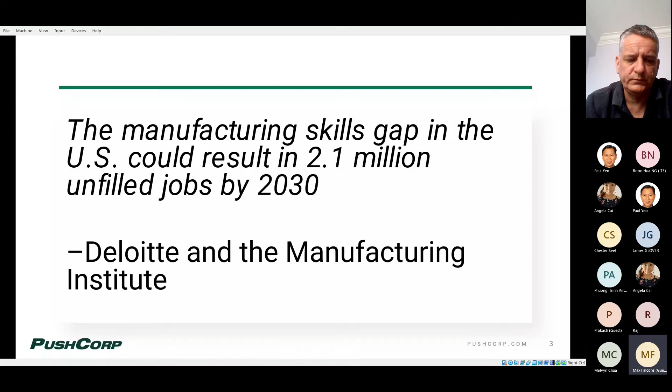So why automate polishing with robots? If you're an end user, like I said, there's labor shortages due to repetitive, dangerous, dull, dirty work, but also a need to increase consistency in the finish from operator to operator, process to process, person to person. Today in a manual operation, you can end up with a lot of variation, where an automated solution gives you a more consistent finish, wears the abrasive less, and is overall a more efficient process.

If you're an integrator, the reality is these polishing projects have less competition out there, and it's still a growing market as opposed to welding, pick and place, and packaging projects, which are very diluted markets right now.

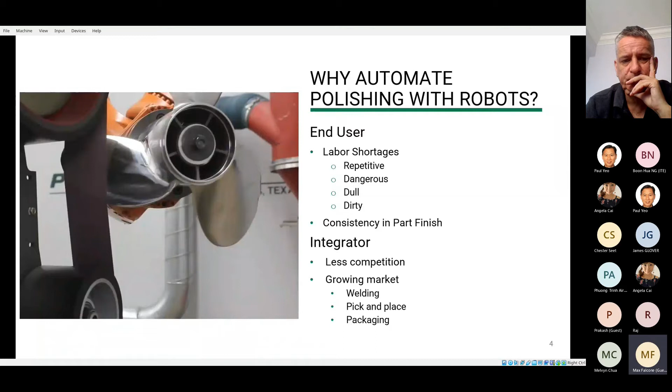So polishing versus buffing—what's the difference? Generally, polishing is done with abrasive belts and discs, and what you're really trying to do is achieve a desired surface finish, usually the reduction of pits, scales, and scratches. You're trying to get that entire surface to be consistent. Typically it's a multi-step process—you'll start with a coarser grit and end up in a fine grit, resulting in a certain directional scratch pattern within the part.

Then buffing complements polishing in that you're generally doing two types: your cut buff and your finish buff. Your cut buff turns the scratch pattern left from polishing into a finer scratch pattern, and your finish buff brings out that brilliant shine. So where polishing typically uses abrasives and discs, buffing usually uses pads—most often a cotton pad, but there are also foam type pads and other materials available for buffing.

In addition to the cotton buffs, many times there's a compound involved. There are new products out there like Norton Saint-Gobain's Fab that actually has the compound impregnated into it, so you just need a little bit of lubricant, like water, to achieve your final finish. The goal of buffing is typically to achieve a bright, lustrous finish, where polishing is just trying to get a consistent finish. Buffing almost always happens after some kind of polishing.

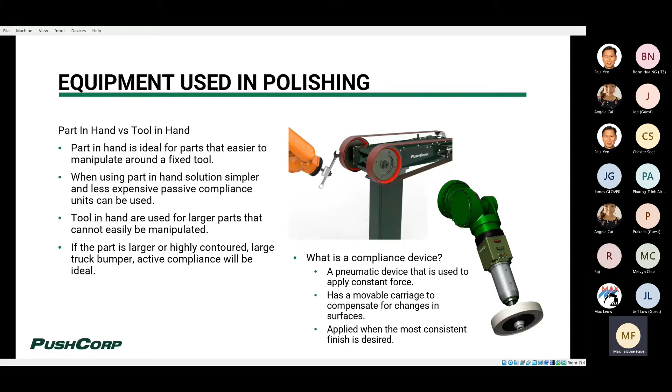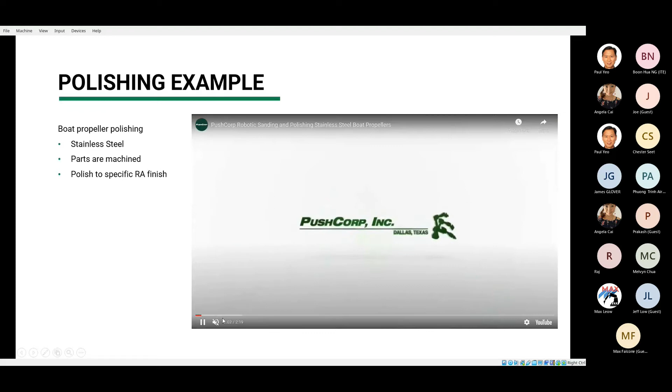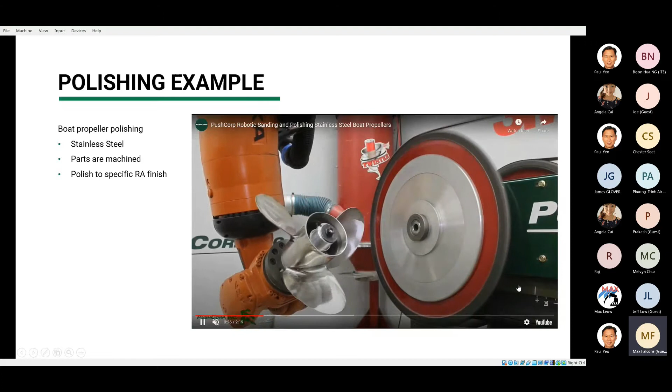So here's a couple example videos. This here is a polishing project for a stainless steel boat propeller that we were involved in. Here you're seeing the compliance device - if you guys can see my mouse, this is the compliance device. Like I said, it has a movable carriage. That unit is applying a constant force forward onto that part. As you can see, with the part in hand, we can handle these unique contours and shapes very easily. The compliance device is able to compensate for the position of the part.

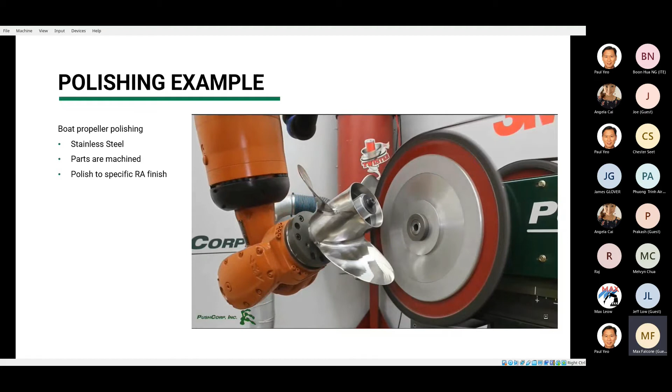One of the things that also helps speed up your process, especially with offline programming like we're going to hear a little bit about, is the robot program doesn't have to be exact, because the compliance device is compensating. So if your part varies some, you don't have to do any post-process vision inspection or offset, as long as the part variation is within the stroke of that compliance device.

Now here on the other side, you'll see we have a slack belt assembly where we allow the belt to wrap around the part, and we're able to achieve this very high gloss or very high surface repeatability finish on this part.

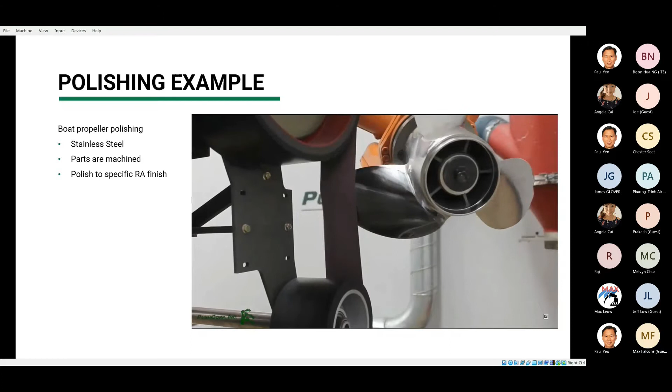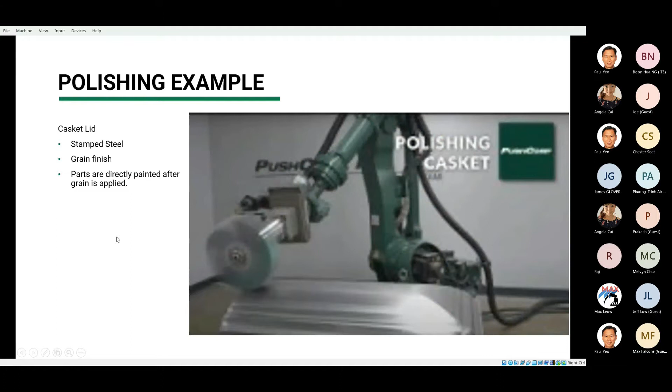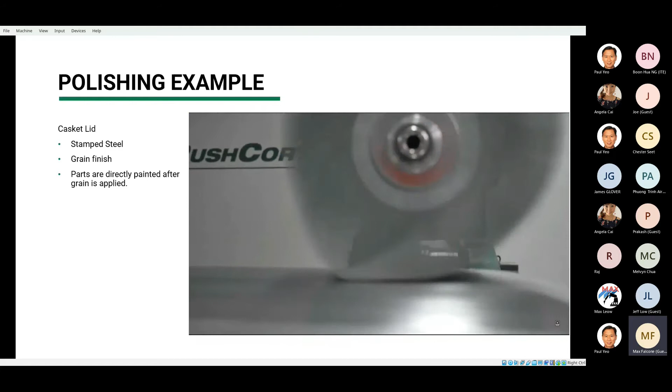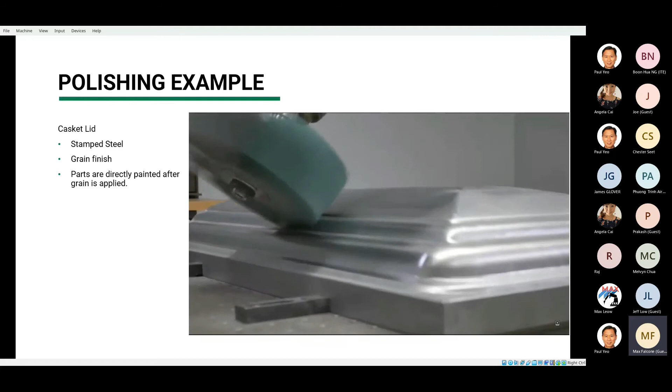So this is another polish project that we did. This is the lid to a casket. We are running a compliance device with a fixed spindle, and that's a 12-inch flap wheel there, where we are putting a grain finish on the top of this casket lid. When this process is complete, they will paint directly over the surface and the scratch pattern will come through the paint. So what we're trying to do is put a consistent scratch pattern in the lid of this casket here.

This is a stamped steel casket. So you can see that, again, the compliance device is compensating for the wheel wear as well as for the different contours on the part itself. So between the robot, the compliance device, the spindle, and the abrasive media, they're all working in concert to give you a consistent finish.

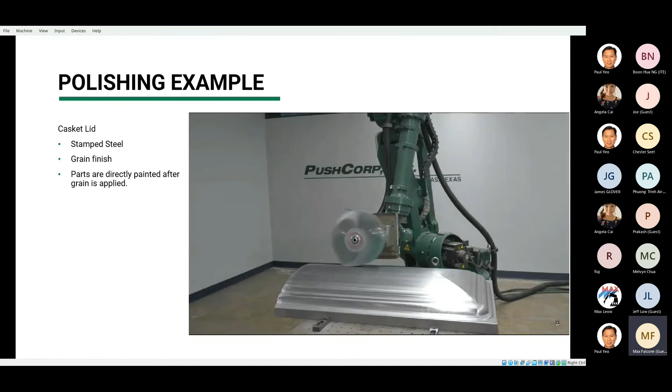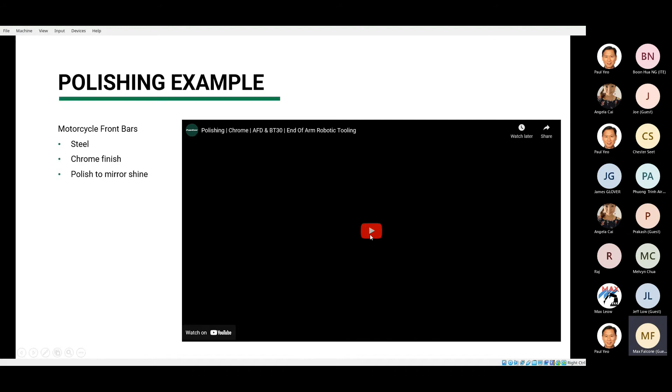And then finally, these are the front bars to a motorcycle or a moped or a scooter. I put this in here - this is more of a polish/buff where these parts are already coated, and we are coming through and giving them a brilliant shine. Once again, you have the robot with the compliance device and the spindle all working together to achieve that high gloss buff. But this is an example of a part and tool in hand buffing application. You can see we're doing both the inside and the outside of that part.

So just to show a little bit of buffing there.

So one slide that I just realized is not in here is, what do you do now when you have an application? Well, you would contact TDS and give them an explanation of your information, and together we'll work closely to do the proper application engineering to suggest the right products for your application. We do have some consignment equipment that we can have for testing that could be done at TDS. Otherwise, we're happy to help with some of that testing in Dallas, Texas.

So in summary, the need for automating polishing applications is growing at a rapid pace.

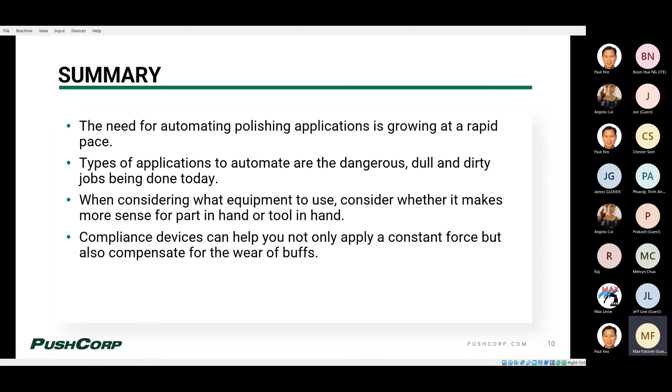I believe this is true for the whole world, based on the activity we've been seeing lately. The types of applications to automate are the dangerous, dull, and dirty jobs—essentially jobs you really don't want people in because they create a lot of dangerous dust. The parts are big, heavy, and awkward, and this equipment, like belt sanders and buffing wheels, can be dangerous if you get your hand caught. So we're trying to get people into safer activities within the plant with less repetitive injuries, and give these jobs to the robots.

When considering what equipment to use, consider whether it makes sense to have the part in hand or the tool in hand. This means looking at how many contours are in the part, whether the robot can rotate it properly, whether the part is easy to pick up with a robot, or whether it's easier to clamp it down to a table and bring the tools to it.

And lastly, compliance devices are really what makes the magic happen because we're able to apply a consistent force on the part at all times. With compliance devices, you're able to adjust that force on the fly—so if one part of the piece needs 5 pounds of force and another needs 10 pounds, that's difficult to do with a robot because all you're adjusting is millimeters. With a compliance device, you can give it a defined force that you want applied, and it will apply that force. In active compliance situations, it can compensate for different orientations and essentially negate gravity.

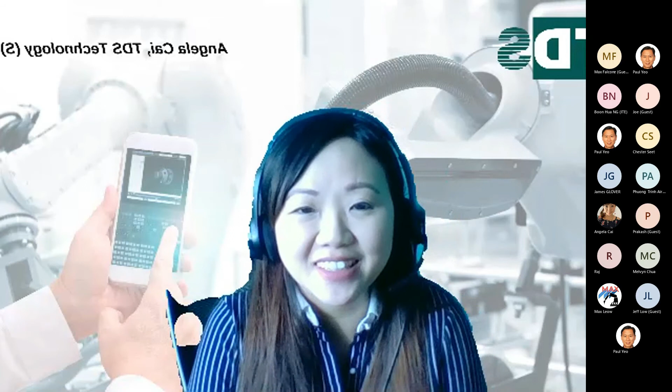Let's welcome Joe from ZIMMER Group. So Joe, feel free to share your slides at any point now. And of course, for the rest of you, if you have any questions, post them in the chat window. Okay, I hope you can see the presentation, the first slide—everything is working fine. Yes, we can see. Thank you. Okay.

First, thanks to TDS for inviting me to this webinar. I'm Joe, as already known. I'm based in Singapore, and I've been 7 years with ZIMMER. I'll talk a little bit, very short, about the company only to give background. Then I'll talk about zero point clamping systems, how you can use them for machine tending and polishing. Then we'll talk about grippers for polishing and tool changers, how you can change between parts or also tools.

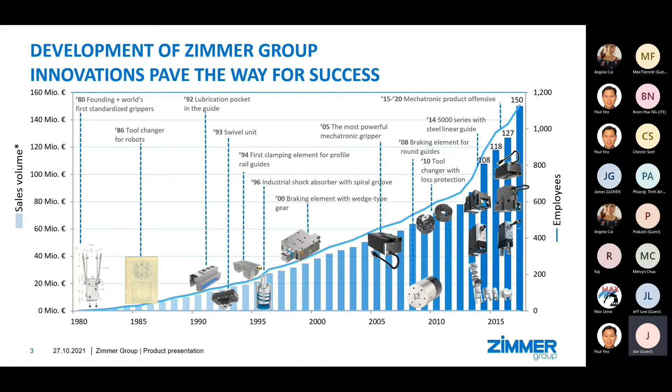Very short—ZIMMER is a company that is 40 years old. It's family owned. We are more than 1,000 people worldwide, and we started with grippers in the 80s. In recent years, we also do a lot of mechatronic parts like electric grippers and other things, including software. ZIMMER doesn't only offer the parts I mentioned, like handling technology—we offer grippers, tool changers, and things like this. We have damping technology, linear clamps for THK, HIWIN, IKO rails. We do process technology like metal injection molding parts, we do spindles in a higher range, and we do our zero point clamps. The last area is system solutions, where we offer complete solutions and not only components.

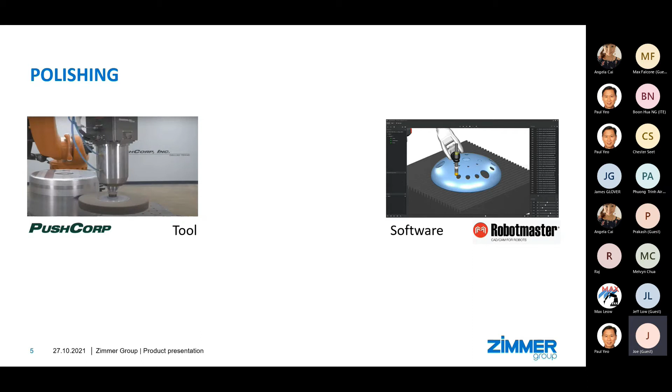Let's talk about polishing. We have PushCorp here today—they take care more of the tool—and we have Robotmaster later, who take care more of the software. We'll look now more at the parts handling, like fixing and holding the parts.

As Max said, there are different ways of polishing. You can have the tool moving while the part is fixed, or you can have the tool fixed while the part is moving. I took here a picture of the PushCorp finishing stand—you saw it in the video too. So one time the part has to be clamped somewhere, and the other time the part has to be guided with a robot or by hand along the tool.

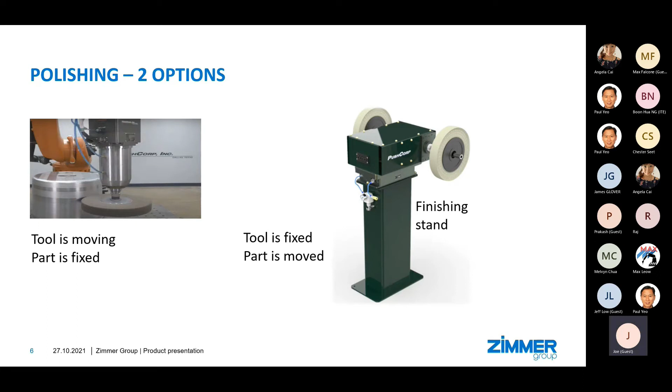If we talk now about fixing the part, many companies still do it manually, with manual loading using a vise or clamping units like clamping straps, hooks, wedge clamps, or cam screws. This means for your working procedure, you have a machine running time, then the complete setup of the workpiece time, and then you can run the machine again, because you have to open all devices, bring out the part, take in the new part, and fix it again.

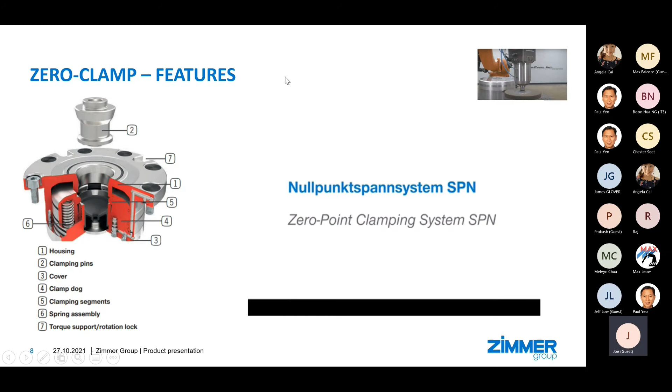So the target should be for many companies to reduce this setup time to a minimum. This we can do with our zero clamp system. This is the system you see on the left side. It looks like a pot, let's say, with a pin.

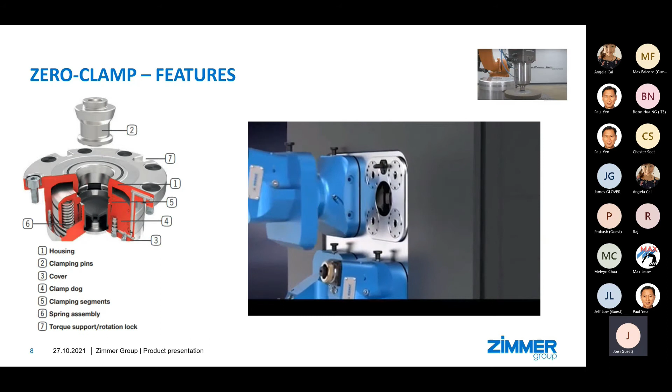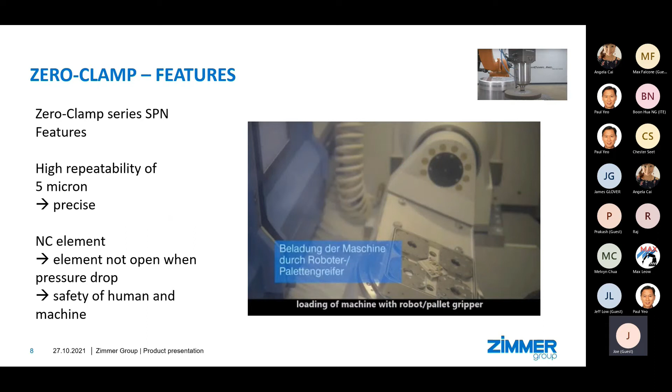It's a quite often used system in machining. With this system we have a very high repeatability. We can lock a complete plate, or a part on a plate, in a very precise way. We have a repeatability of 5 micron here. The element is an NC, normally closed element, so it only opens when you give air. It's also in a certain way safe.

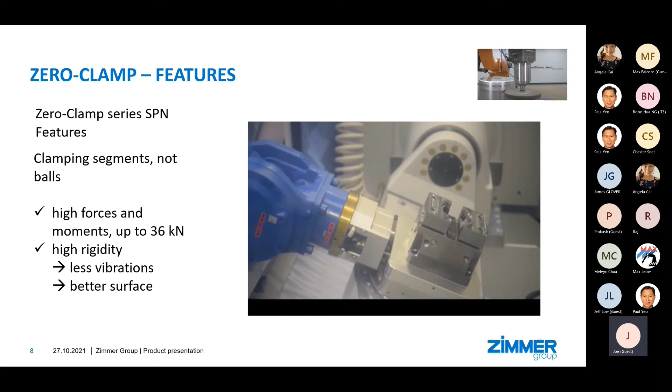The zero clamp systems, how we offer them, have clamping segments, not only balls inside. So we have very high forces and moments, and because of the segments, we have high rigidity. This means at the end we have less vibrations, and especially for polishing or these sensitive working procedures, you get a much better surface.

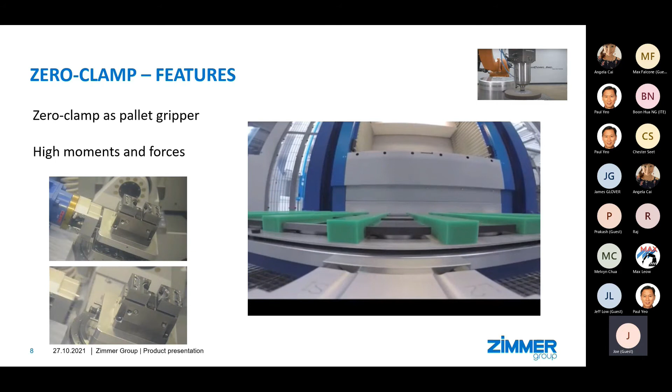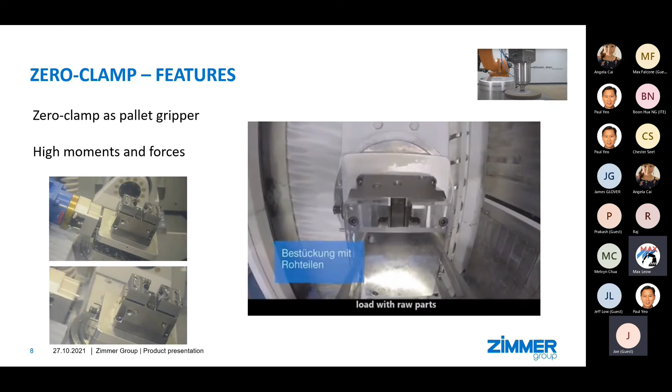You see on the video on the right side and on the left side we saw it before with a smaller plate. We can also have it as a pallet gripper. We can use this zero clamp for the complete infeed of a pallet, because we can have very high moments and forces, so we can also handle big pallets.

In general, zero clamps are normally in stainless steel design, so they can be used in CNC machines or in polishing applications. Each element has a rotation prevention, so you can also use just one element. We call it a plus connection to increase the force and the moment of the element.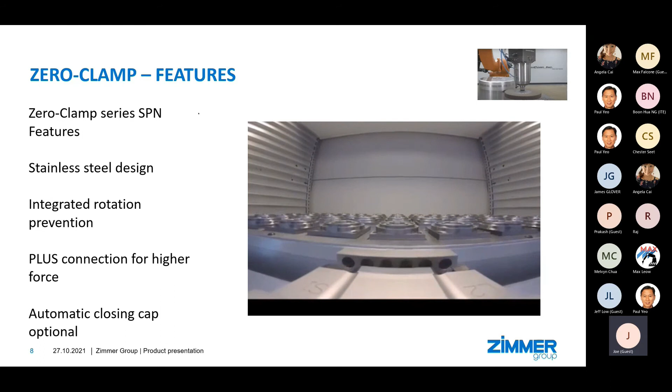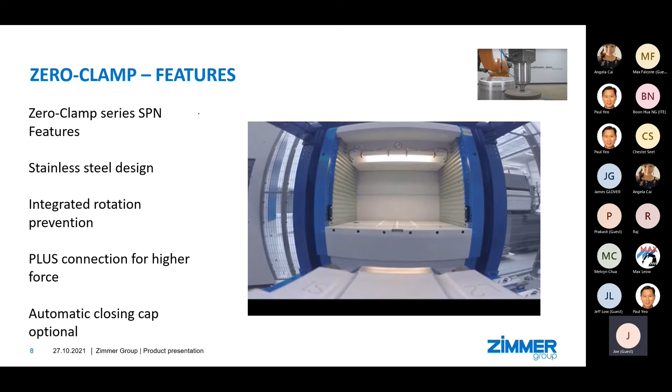And what is quite interesting for polishing, we have an automatic closing cap. This means if you take out the pin, dust cannot fall in because a cap comes up and closes the system. These zero clamp systems to change the complete plate are available in 4 and 6 bar, and we have options like blow off and a machine part detector inside.

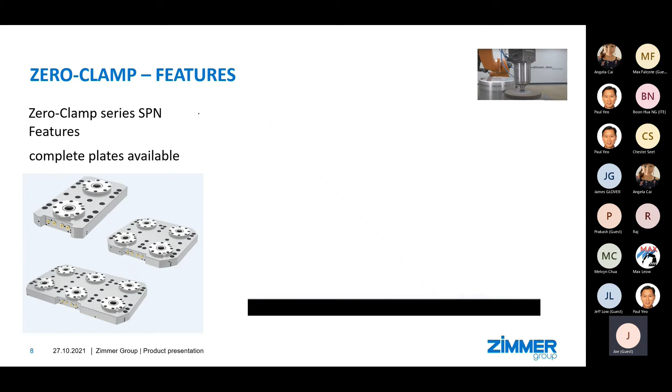Beside this, we can have these complete plates in 2, 4, or 6 units. So with this system, as you see at the bottom, you can prepare a complete plate with several parts. You can have these plates with 4 units, and then you reduce your setup time significantly, because you can prepare this plate while the machine is running, then you only change the plate very fast, and you have additional free machine capacity.

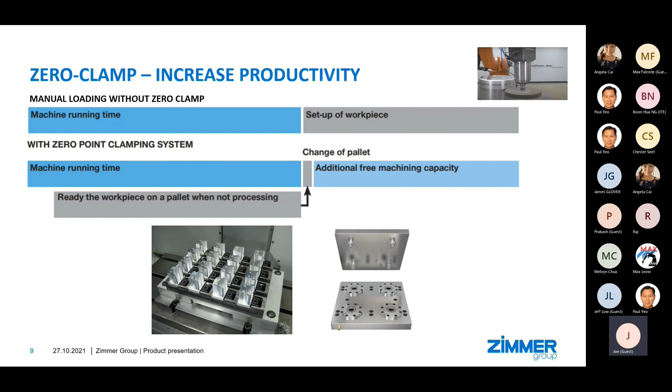So as a summary for the zero clamps, this system is interesting for machining because we have very high repeatability. For polishing this repeatability is maybe not so important because they can tolerate something, but in general for CNC machining or similar, this is very interesting. You save a lot of time during changeover with this system because you simply exchange the plate, so you increase your productivity. The system is an NC element, so even if you drop the pressure, it stays clamped. And all in all, you save costs.

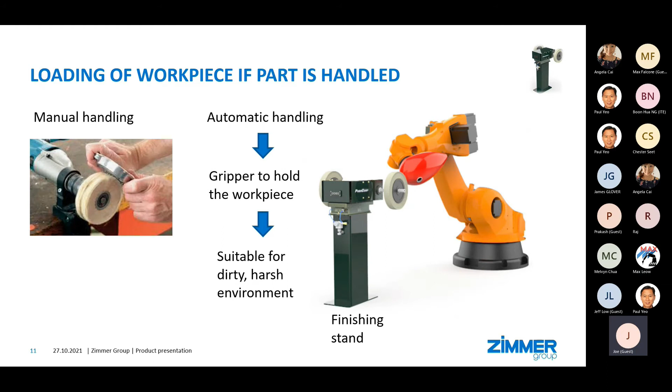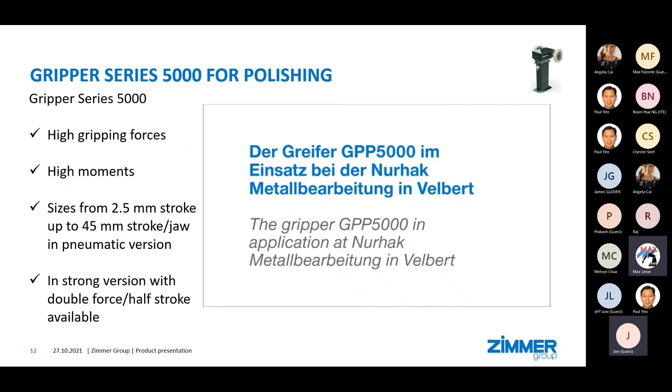This gripper must be suitable for dirty and harsh environments, otherwise you get problems. Here is an example video of a production in Germany where they use a gripper from the series 5000.

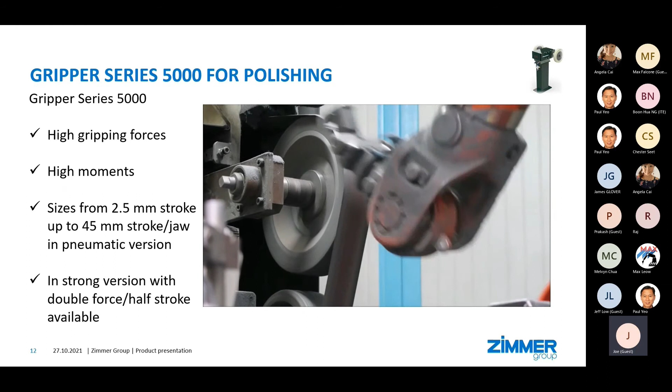This gripper has very high forces and can have high moments. We can have very different sizes, from 2.5 millimeter stroke up to 45 millimeter stroke. The gripper in the video has 10 millimeter stroke, so it's a medium size, and perfect for these parts. Additionally, you can have this gripper in a strong version, meaning half stroke but double force already, so you have more safety in the holding process.

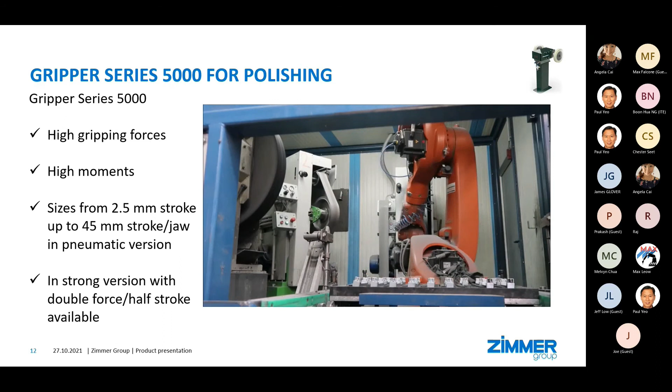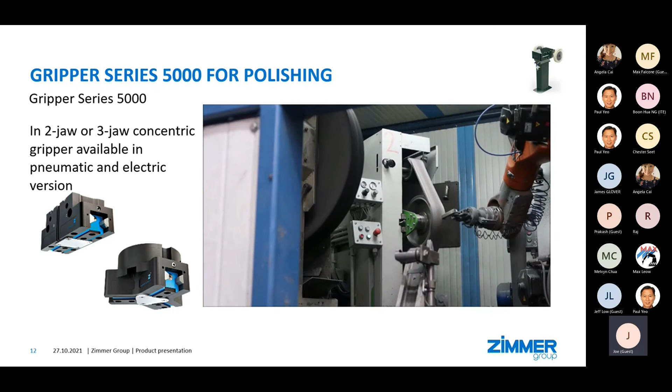This gripper is available, like here on the video, in two jaw gripping and 3 jaw concentric gripping. Later we have another video with a 3 jaw, and here we go through different grinding and polishing steps. This is an automatic process which can work 24/7, and the space requirement is also less.

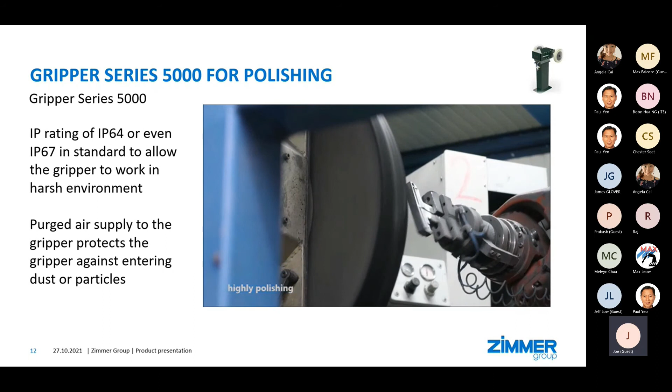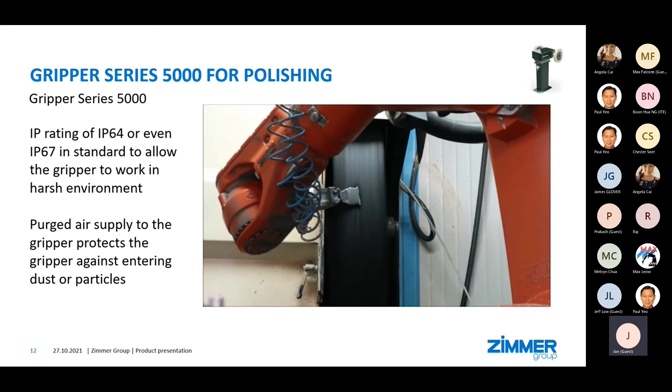This gripper is in standard already IP64. It can even be IP67 when more protection against water is needed, but IP64 in this case is the interesting rating, which allows the gripper to work in this harsh environment like in this video. To reach this IP64, we also use purged air, meaning we blow air inside the gripper and have a slight overpressure inside, so dust or small particles cannot come inside the gripper. That's how we protect the gripper from getting spoiled.

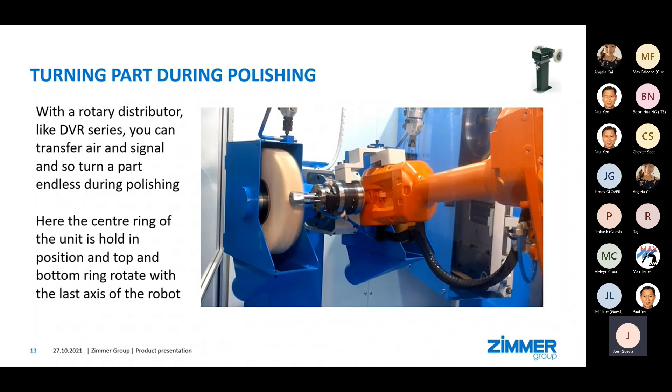Here is the application with a 3-jaw gripper, more for buffing. What's special here is that we turn the part during the operation, so you have a shiny surface continuously around the part.

We grip the part, and we have a sensor so we know we grip the part, so we have to bring air and signal through the system. You can see we can turn endlessly with the last axis. Our DVR rotary distributor can do this. We have several air channels and several signal channels to go through and operate, as shown here with endless turning.

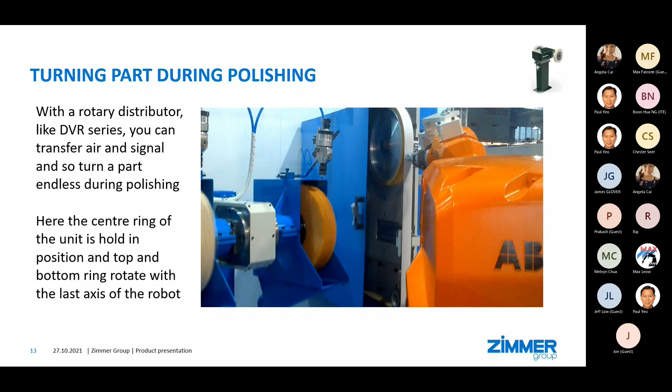So, a summary for gripping parts during polishing: with our 5000 series, for example, we can have long fingers, we can be far away from the dust, and we can have high forces and high moments, which is important because the part should really be held during polishing.

The 5000 series here is available in an IP64 version and has very good sealing, even IP67 against water. This is because of the use of purged air, where we press out particles, let's say, because of this overpressure. Together with the rotary distributor like the DVR, we can do endless turning applications for round parts. The DVR unit transfers air and signal.

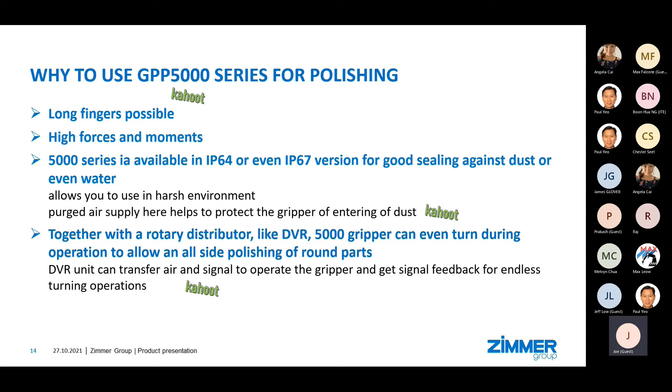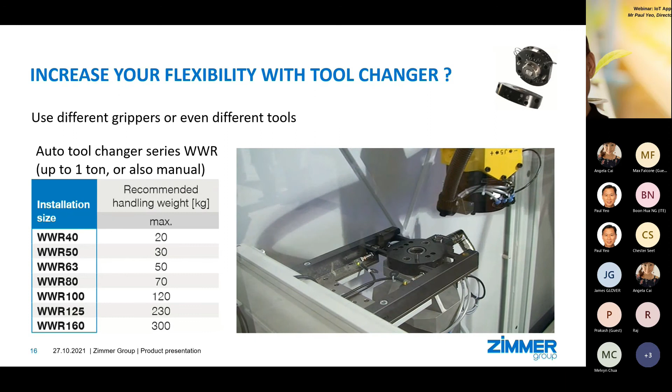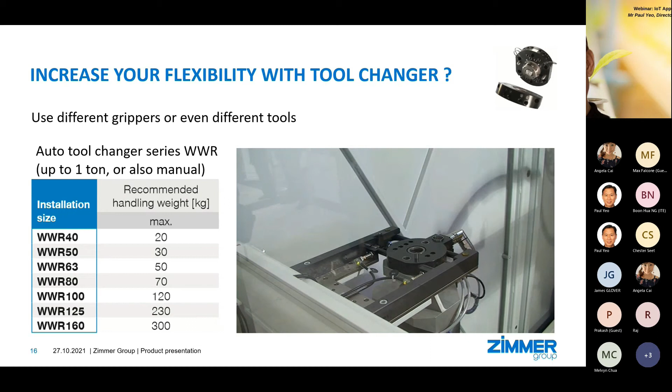Tool changers are often manual or automatic. Automatic, like here in the video, is pneumatic control. This is a tool changer for 230 kg payload. We also have this smaller; our standard sizes go from 20 to 300 kg, and this is certainly something where you can also do polishing applications. For heavy stuff, we go up to 1 ton handling capacity.

Here I took the example for UR, because TDS is also a UR partner, so this could be interesting. We have our size 50 tool changer fit directly to UR, to the flange. You don't need anything in between, and we have a payload of 30 kg here. This small, tiny tool changer already has a moment in each direction of 100 Newton meters, so polishing or buffing is not a problem here.

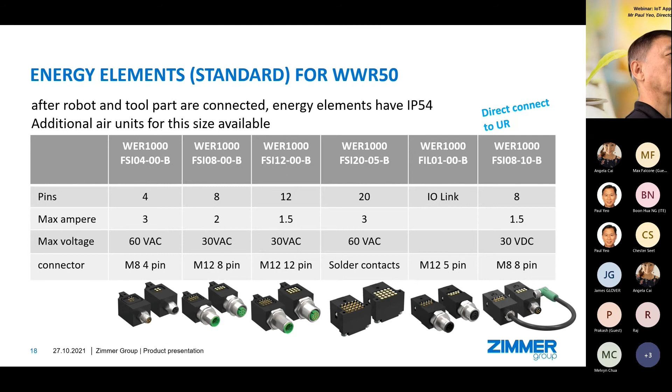We have different energy elements here, as shown before with the rotary distributor or the gripper itself. You might need sensor signals, or maybe you change the tool changer to another tool which needs other sensors or something else. So we have a wide range of energy elements which are, interestingly, in connected status already IP54. So dust is not the main problem. Sure, if the tool changer is open, dust can fall in - that's the nature of the tool changer. But in connected status, no problem.

So as a summary for the tool changer: we have a high payload - our UR tool changer goes up to 30 kg. We have high moments due to a special design of our locking mechanism. Our tool changer is low in height, so we have less moments on the robot, and we have many media transfer options like fluid and high power, water-cooled spindles we can bring through, and in coupled version via IP54.

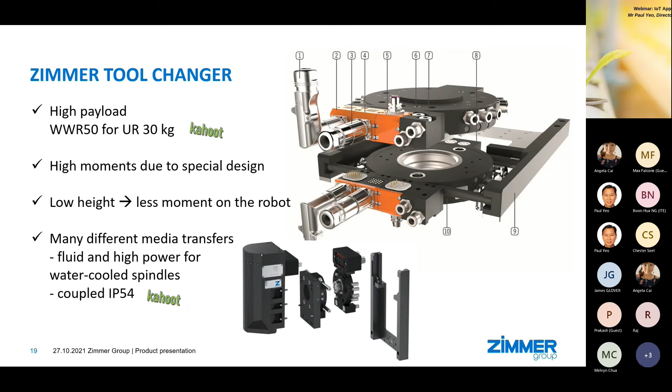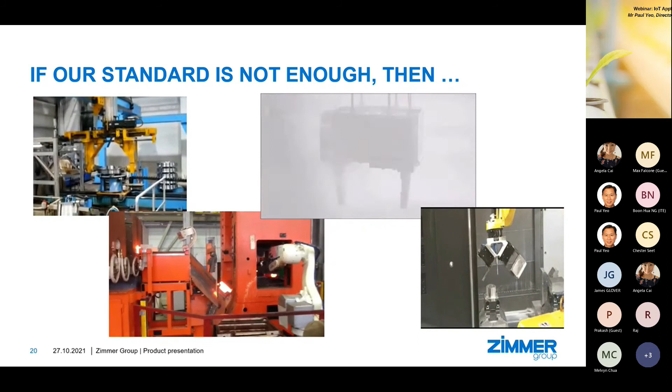At the end, very short, some videos for applications if our standard is not enough. This is our system solution where we handle parts up to 1.5 ton. This is the train wheel on the left side. We can handle hot parts. We do machine tending as complete solutions, and we have washing applications as standard.

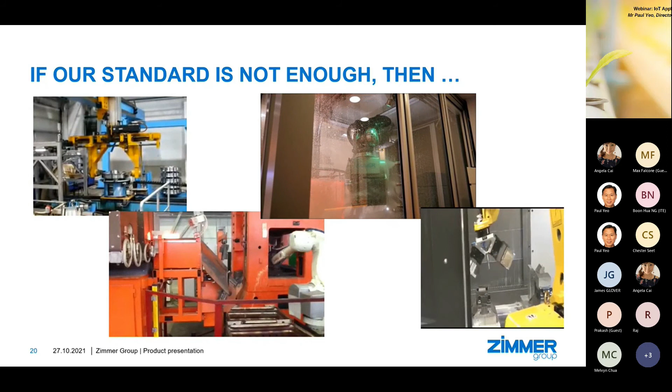Okay, that's from my side. If more interest, I'm here for questions too. On our homepage you can visit our virtual expo where you can see the parts, and you can also go to our system area and watch our customized solutions. Okay, that's my side.

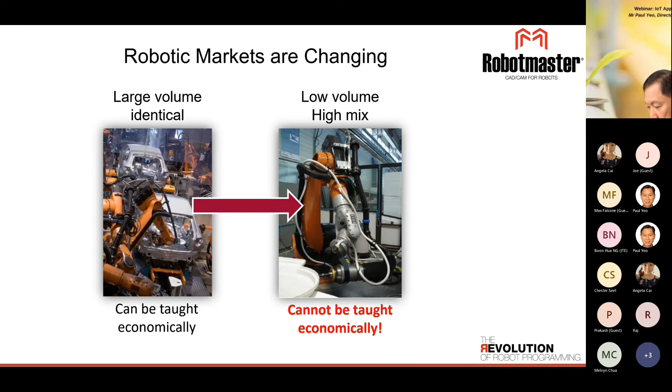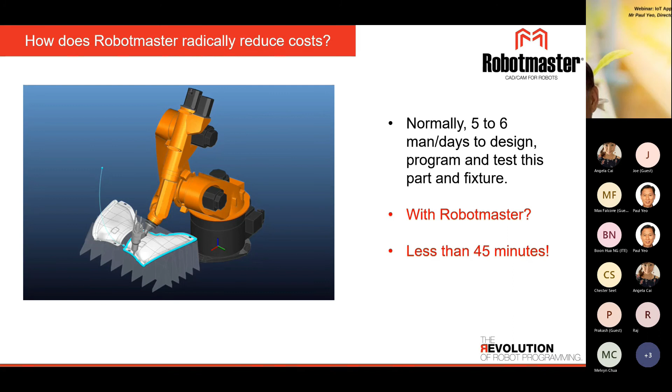One of the things Robotmaster has concentrated on over the last 12 years is programming robots and then correcting all of the kinematic problems you might have. Basically, our goal is to eliminate teaching - taking projects that would take 5-6 days to design and program into the robot manually by teaching, and doing it in rapid time. Our goal is no more teaching.

Most of the actual jobs in robot polishing today are done by teaching. As we did in the beginning when we were using Robotmaster, we were importing multi-surface milling paths from CAD/CAM systems, be it Robotmaster, hyperMILL, or the Autodesk 360 programs - we could import all of those. But we found that milling paths are not polishing paths, and most of the paths you receive from other systems are very difficult to modify. You always have to make changes when working with compliance of parts and polishing.

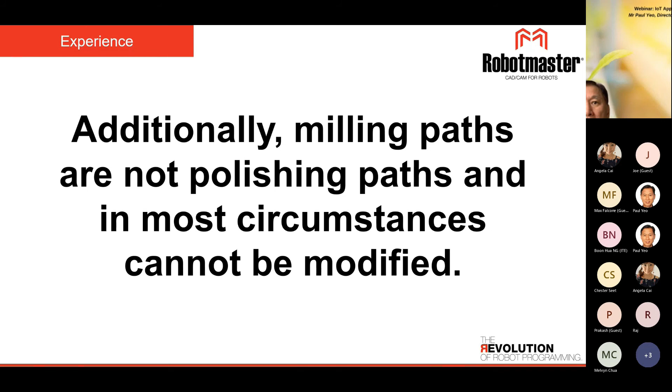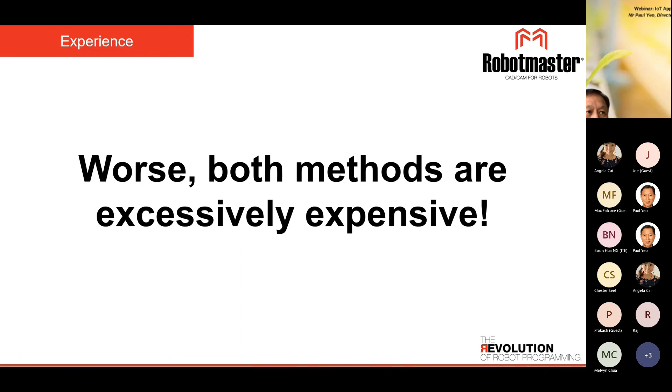What is even worse, both methods are just outrageously expensive. Teaching is expensive in time and the blocking of production. And if you're importing CAD/CAM paths from a milling system, most of those systems start at $15,000 and more. So on top of the price of Robotmaster, you'd have to shell out another $15,000 to $20,000. Clients weren't happy about that when the price of the software was exceeding that of the actual robot. Even though the software could produce more, it was still a very big problem for clients. So we thought if we have to build it faster, better, and cheaper, we decided to develop our own software.

We developed our own software for robot polishing, sanding, and spraying. We had already done that for welding and for contouring, and we sell a lot of that. But our biggest market we saw in the future would be in robot polishing, because as Max said in the beginning with his PushCorp presentation, these are neglected markets - no one has really addressed them. So we decided to develop our own program called Robotmaster Surfaces, dedicated for polishing, sanding, and spraying.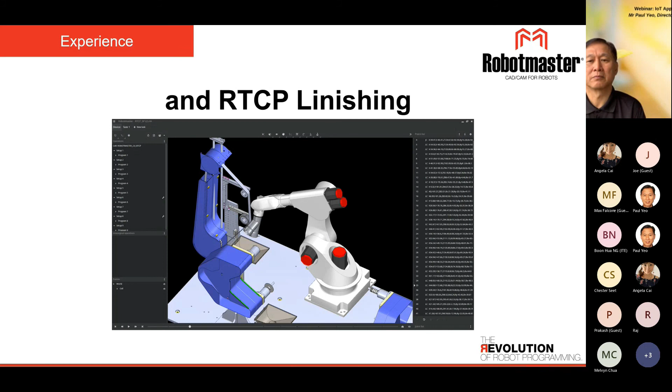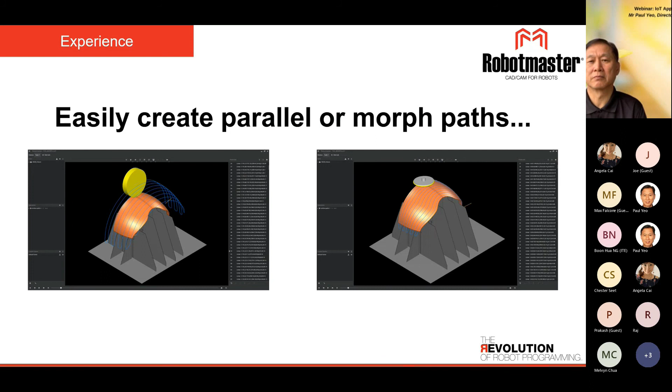So we support all of the polishing wheels or pads. You can also support RTCP linishing, and we have a special program for what they call tool in hand - we call it remote tool center point, where we keep the control point constant. So you get much better polishing results. We can easily create parallel paths, and you can easily create morphing paths.

We even started recently with spiral paths. This is a very recent product. We've been working on it for over 2 years now, and within the last 6 months it has just exploded in sales, becoming a large part of it, especially in China.

We do spiral paths because we have a lot of clients requesting that for circular objects, and they don't want to leave a mark at any position.

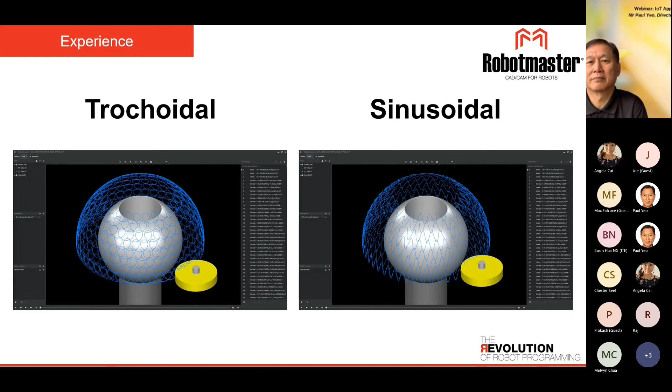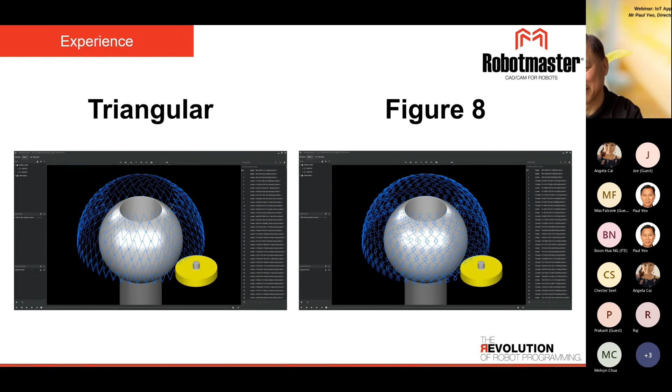Recently we've added all of the different paths to eliminate marks on the side while you're polishing. We have trochoidal, sinusoidal paths. I can take any path that we generate inside of Robotmaster surfaces and change it to triangular or figure eight. So we have 4 different options within the paths. These are very essential so you won't leave marks on the outside edges.

We also give the user complete control of the position of the pad on the actual polishing product. We can tilt it, shift it forward, left or right. You have complete control of the pad, and you have complete control of the path also.

At any time I can go in and modify the path, which if you're bringing these in from other CAD CAM products, you can't do that because you have to take what they give you. We generate it relative to the actual surface of the object, and from that we can modify and change the position of the paths at any time. So it's much easier to control your actual polishing paths for compliance.

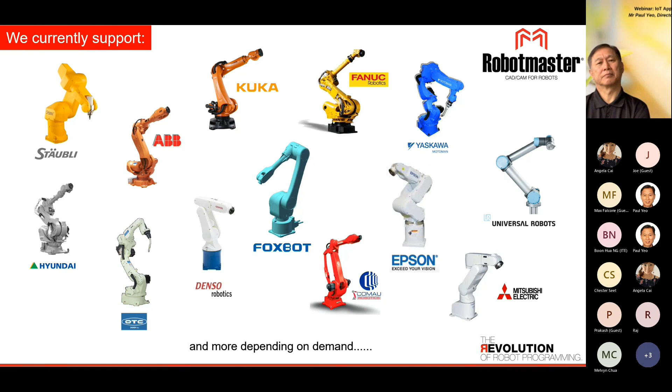We also work with every robot that's out there. We do a lot of trimming, polishing, contouring, everything you want. Usually people doing sanding and finishing are also doing other things, like deburring, so you can do deburring at the same time. And we have our own contouring product.

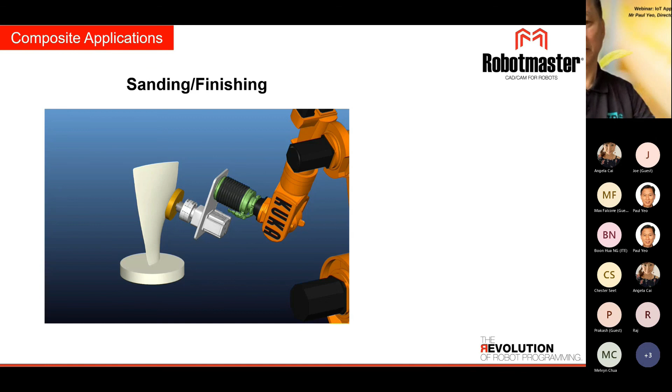Everything we're doing is designed for robots. It's not milling CAD CAM that's adapted to robots—it is designed for robots. Everything our clients have asked us, we have adapted now into the product.

So you can do polishing tools, and we support the compliant tools. The product was also designed for spray deposition, where you can actually calculate and see the deposition of the material on the product. So it's more than just a polishing product.

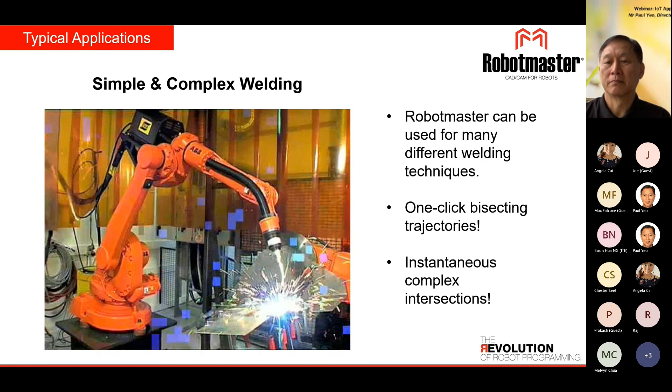And then we also do the welding and everything. Let me change here.

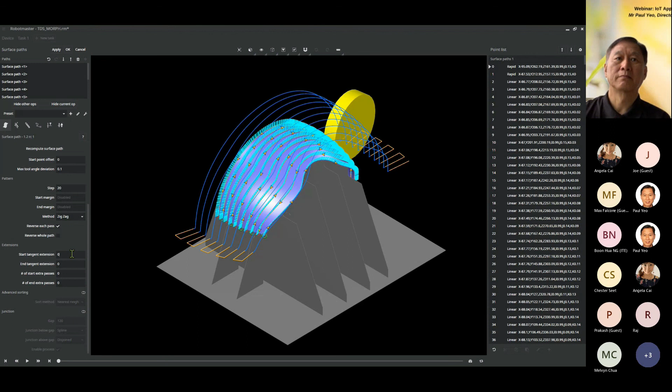One thing we allow you, the users, to do is quickly change everything and modify to the desire of the client. Most of the time you want to do an extension so the polishing wheel goes beyond the edges. I can go in and change that.

We can also go in and change margins of starting and ending of the actual paths. We'll put this in 10 millimeters since it's a 20 millimeter path. And I can join all the paths with splines at the end, recalculate, apply it. Now everything has a complete spline at the end, joining the paths, and it's one solid path.

At any time, we give you complete control with a very easy menu system, and everything has been designed for polishing, sanding, and spraying.

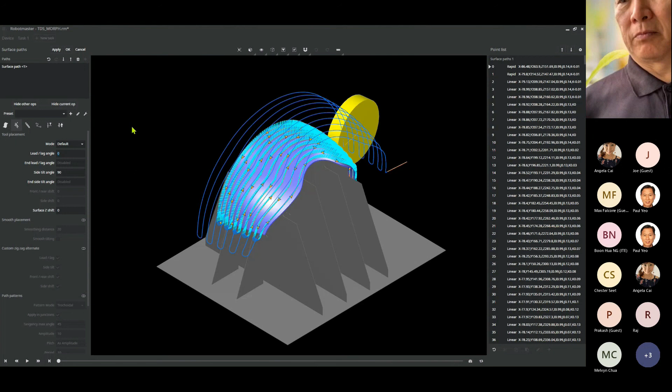So this is a new product. It's become very high in demand very quickly, and we're quite proud of it. We've spent a lot of time working on it, listening to the input from our clients, and it satisfies the demands of what the polishing people have. And the best part is it's inexpensive—it's not $20,000 or $18,000. It's on average about $3,000, which most people are shocked by. You have a complete multi-surface CAD CAM program for less than $3,000 that you can add into Robotmaster.

So this is pretty much what we've done. It's a radical change in the market. And I'd like to thank you all for taking the time to come and watch this.

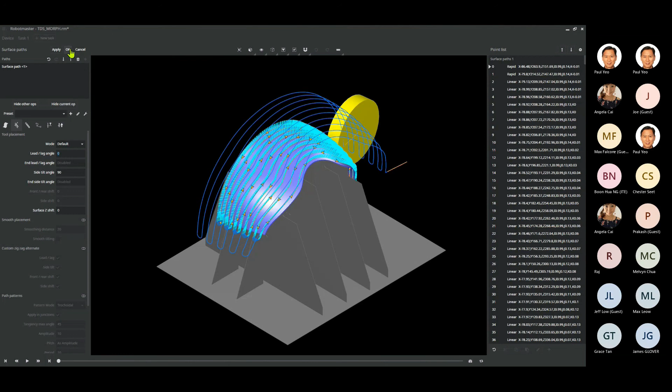So very quickly and easily, you can polish the product.

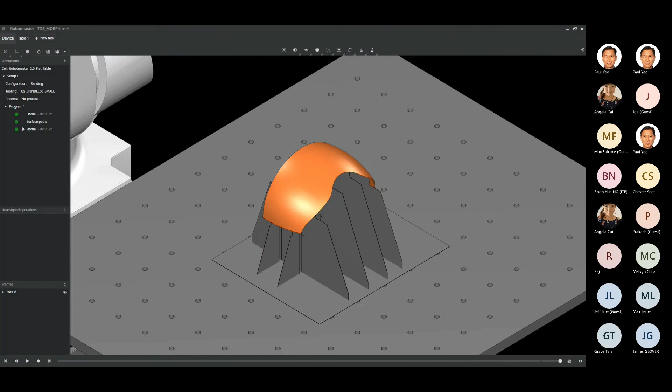So that is the end of my quick presentation. But if you guys have any questions, please contact TDS. They have the program now, even though it's new, and they will gladly show you how it can apply. It's a very good one, working along with the UR robots. We have a large interest from UR clients concerning polishing. So please contact TDS, and they'll take care of you.